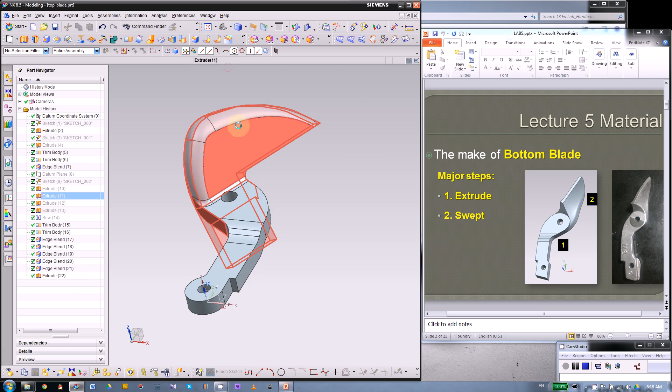Before that, we're gonna start with the top blade. As some of you found out, the instruction video I gave you has some mistakes - the blade part of this piece was not flat, it was like the extrude was not horizontal. So I did some modification here, and since you already submitted the homework, you don't have to change that.

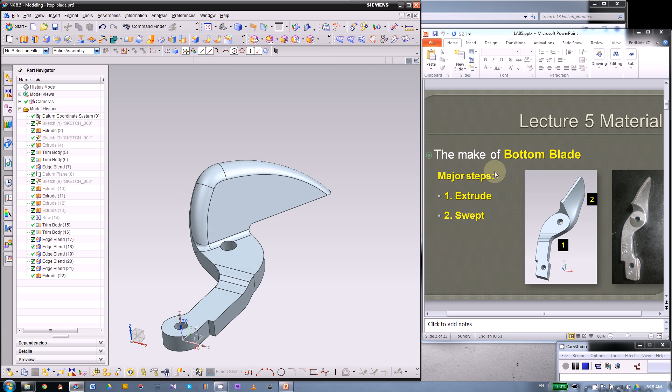We will give out the .prt file, so you can use them for your assembly to make sure the top and bottom blades fit each other. You can also follow this video to modify this top blade.

So what I did is basically you first change this sketch. Remember we had a fillet here, so first we're gonna get rid of that fillet. You can use quick extend to extend those two straight lines and make them connect at this point. Then you delete that fillet.

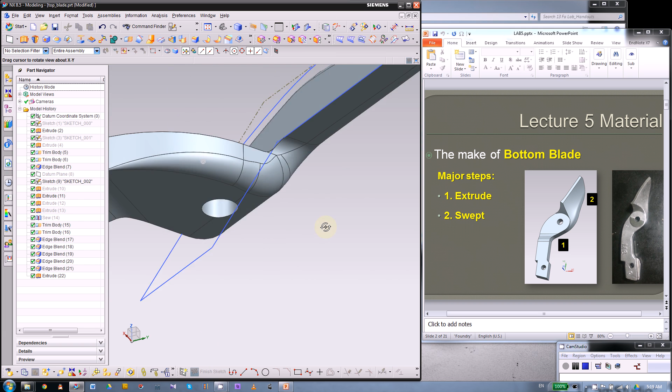After that you will extrude as usual, so you don't have to change the extrude. It will automatically give you that straight corner, but you will have some problem for those extrude edge blends - they will have errors, so you can leave them alone and take care of them later.

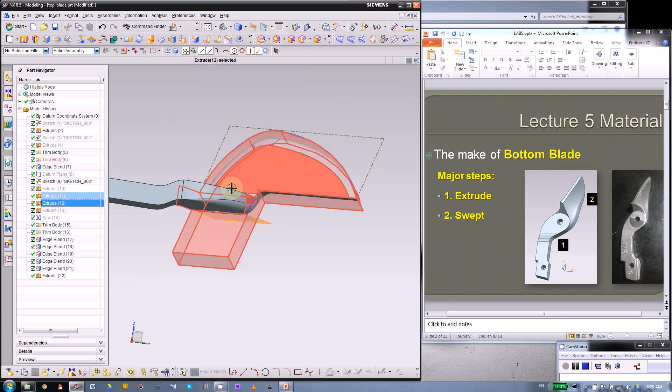After that you will basically extrude two edges. I guess you need to extrude this edge, so you can use extrude, then pick this edge, or this curve, whichever - I think it's better to pick the curve.

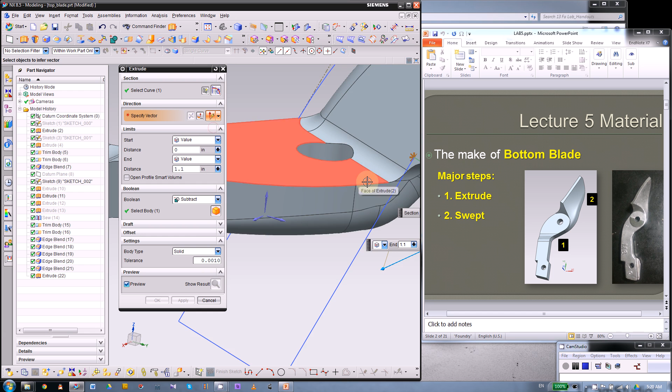Let me see - yep, you can pick this curve. Then you want to specify the vector to be one of these lines, this straight line. Should be inferred - then you can pick one of the lines that will give you a flat or horizontal direction. Then you can change the direction to the other side.

So this sheet will cut into the extrusion we just made, then cut off the excessive solid volume. But we also need to cut off this corner.

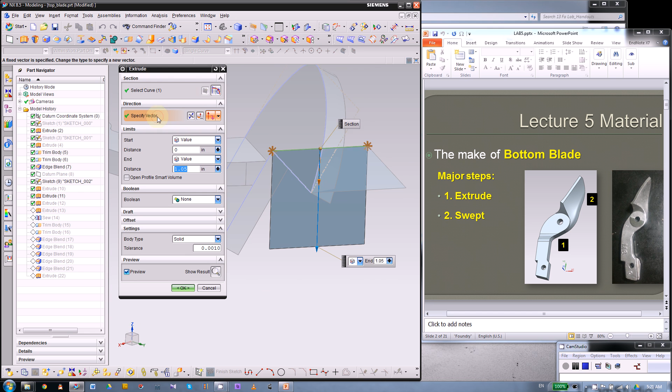So I also extruded this straight line. And for this, you probably need to build a datum and draw a straight line on that direction. Then you can extrude by specifying a vector. This vector should be the z direction, so you can simply pick z.

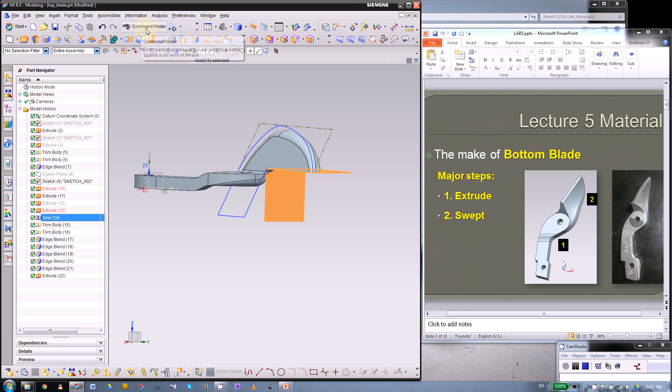After that, you will have two sheets - this one and that vertical one. Then you can use a sew command. It's very deep down in the menu, so you probably want to use command finder to find this command.

Simply type in the command, then you can pick this command. Then you can pick two faces. The purpose of this is because trim body can only have one sheet as the tool, so you cannot trim this corner at once using two separate sheets.

So you want to combine them into one before you do the trim body. After that, you will have this rectangle sheet.

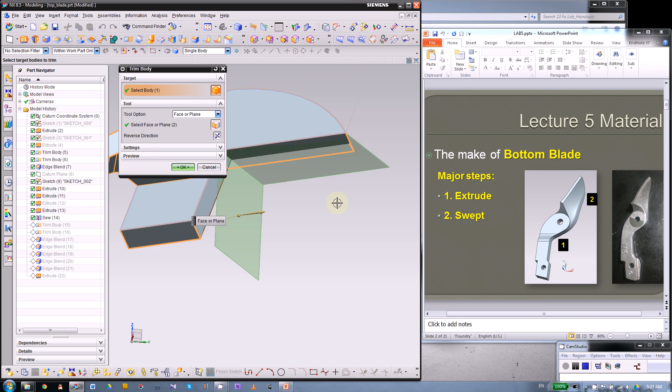Then you can pick the body, then pick the face. But here you want to just pick from the part navigator, so you can pick two sheets at once. If you click on the geometry, probably you will not be able to pick both of them. So that's what you're gonna do.

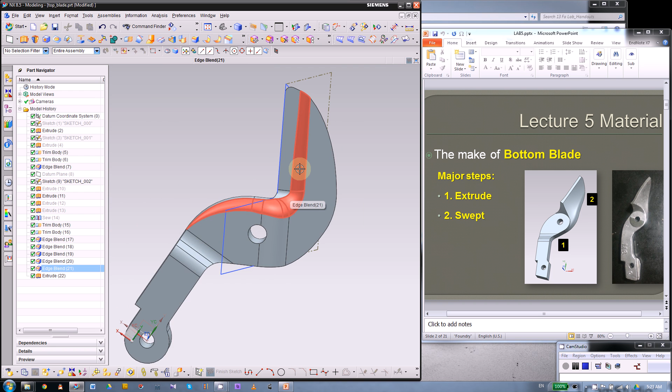After you trim off this corner, then you can go back and do the edge blend and fix it. Probably it's better to just delete this last edge blend because it will have a lot of errors, so you can redo that. That's the process of fixing this top blade.

Now let's start with the bottom blade. The bottom blade basically consists of two parts - this flat piece is relatively regular, it was made from extrude. Then this piece, number 2 in the picture, is made from sweep.

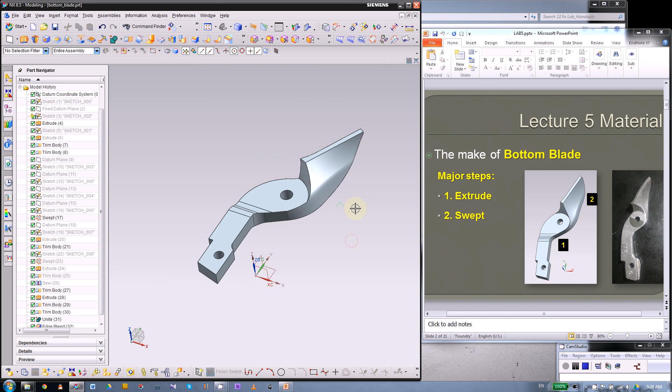So we're gonna separate this part into two major steps. The extrude part will be basically flipped from the top blade. So we're gonna start from this top blade and use save as, following this slides, we're gonna use the top blade as a template.

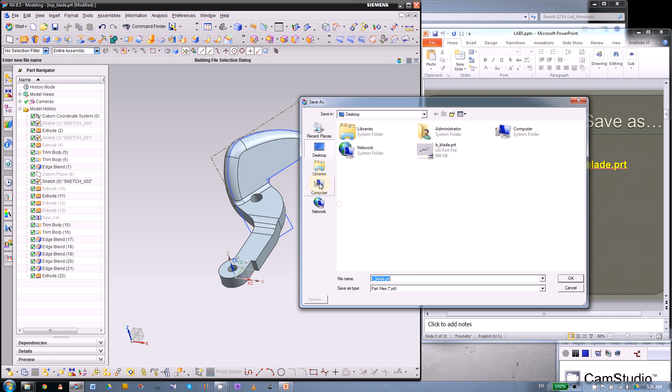Okay, so first we're gonna save the top blade as bottom blade. Then we're gonna do some cleanup. We only need two things, I think. Yeah, we only need first this sketch.

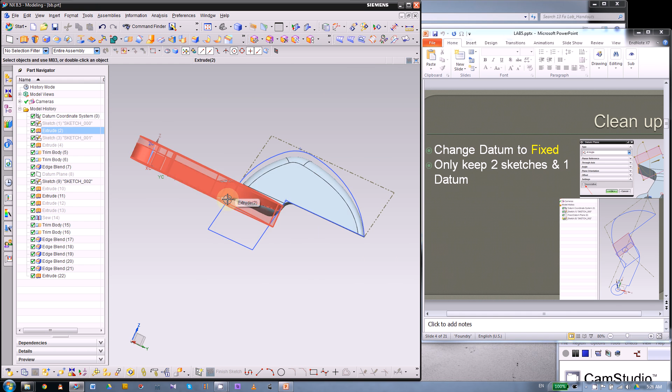This sketch will define the height of the blade for the bottom, so the two blades will match. The second will be this sketch for this extrude, and it should be exactly the same as the top blade, but different shape, extrude.

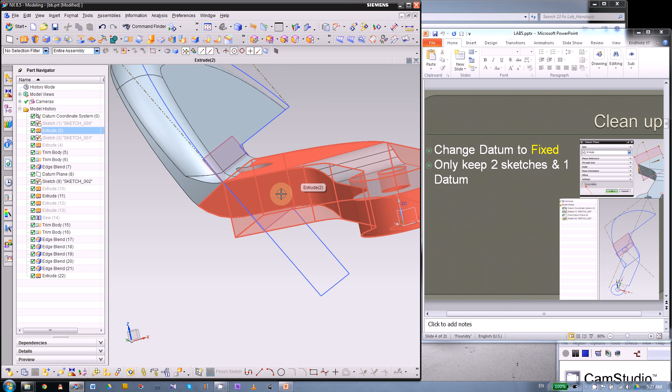So first thing is we're gonna change this datum. We can show this datum because it's based on this extrude, and we are going to delete this extrude. So you want to make this datum a fixed datum instead of relative datum.

After you delete that extrude, this relative datum will be deleted. That's the reason. So we can double click this datum, and clear this checkbox. Then this will be a fixed datum, not related to this extrude anymore.

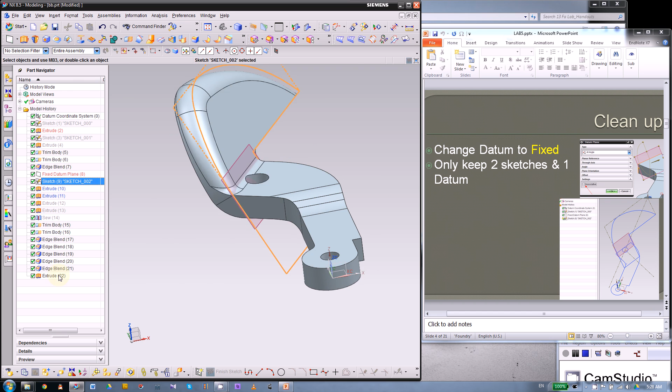Alright, so let's see, we can start from below everything below this sketch, delete them, and see what happens. Alright, that's fine. We will need those two, so we're gonna try to delete them one by one, or maybe from here to here. Let's see what happens. Alright, that's fine, and don't worry about this mark here.

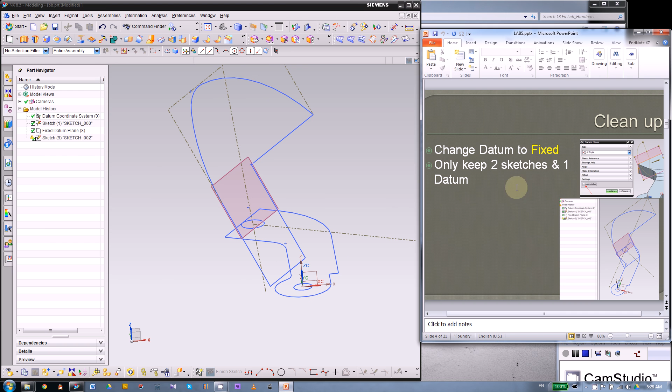All we need is this sketch. Alright, so as you can see in the slides, we're gonna keep three features of the top plate, which are the two sketches and one datum.

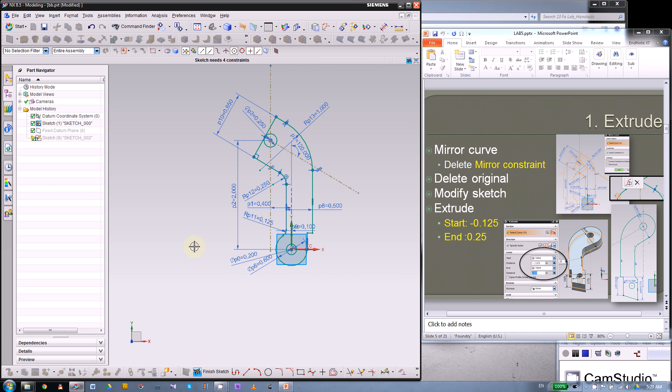Next, we're gonna modify this sketch, so we can hide those two features. And from here, we're gonna flip the whole geometry to the other side. So we're gonna use mirror curve.

We can pick everything here, and the center line will be again this center line, the center of this hole. Then we can click OK.

Then we want to delete the original part, and we cannot do that now, because once you delete the original part, the mirrored part will also be deleted. Look, if I delete this curve, that line is deleted also. That's why we need to first delete the mirror constraint, which is here.

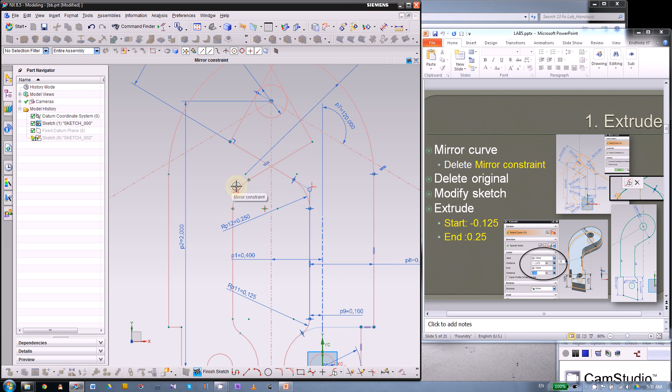You want to make sure you have the show constraint turned on. Let's see where I can find this - display sketch constraint. If you have this turned off, you will not be able to find that. So you want to turn this on and hover your curves on top of this constraint, and you can see the text. That's what we want to pick.

Then you can simply press delete. So now we can delete everything on the original shape. We're just going to pick them up, and I don't want to pick this datum up.

And then also those dimensions, since they're the dimension for the right side. All right, that's the left side, and if you remember, we had two circles here. Once you delete one, there's still one there.

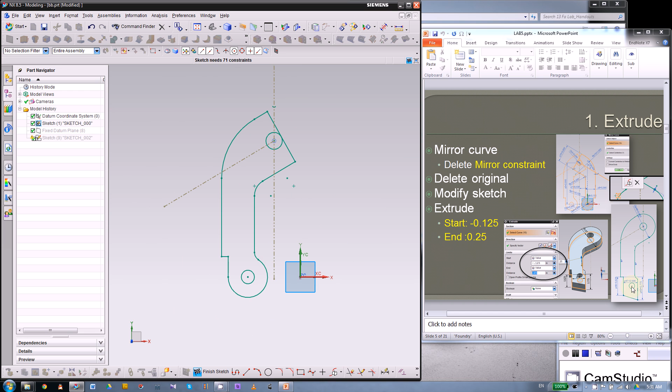And now we're gonna do some modification on the bottom of this, let's say, handle. The shape of this part is more like a square. So we're gonna first extend this part, then add another straight line here, and I think we can just simply delete - no, cannot.

Okay, so I'm gonna put a dimension here to extend this straight line, but by default I think this line will go up instead of go down. So what you want to do is first fix this short line.

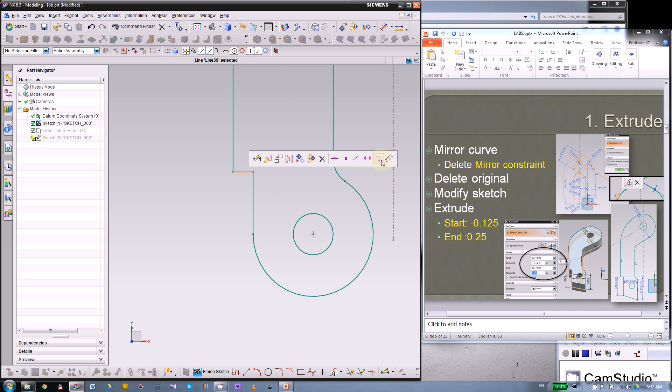So once you click this, we can use fixed constraint. Actually, you can fix this whole top part of the sketch, but we're just doing this one by one. So this line will be - let me zoom in a little bit.

0.625, that'll be 0.625. So this thing is going up, and I'm gonna put a constraint here, coincident - make this point be coincident to this point. So that will make this thing come down a little bit.

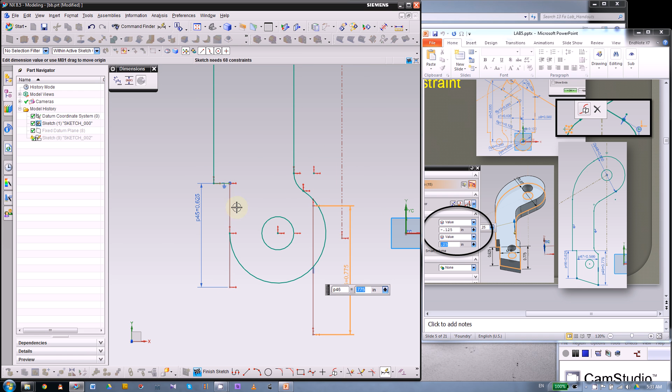Then on the right side, we're gonna draw a straight line. Then the dimension will be - the length should be 0.775. Then the distance between these two straight lines is going to be 0.85.

Then we want to make sure this start point is aligned with this short line, so we can put a constraint - point on line. We're going to constrain this point to this straight line. That will give us this dashed line. Then we can close this cap.

Lastly, you want to just trim off the excessive curve. So that's it for the bottom, and then we're gonna make a circle on the top.

Which will be 0.85 in diameter. So we can simply just draw a circle here, diameter will be 0.85. Okay, so it seems this thing moved a little bit. I'm gonna come back - either we can fix this line first like this.

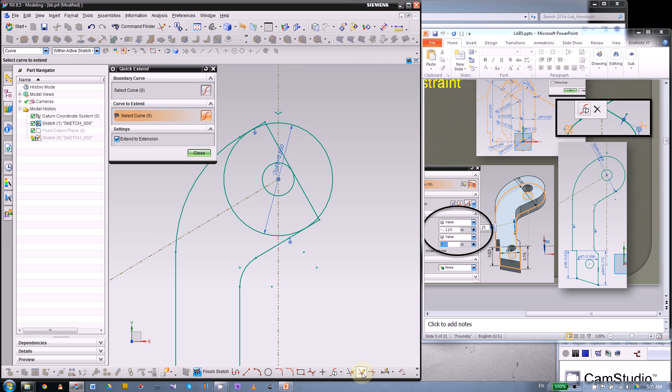Okay, that might be a better idea. Then we can add the circle, 0.85. Okay, so now we can trim off those curves.

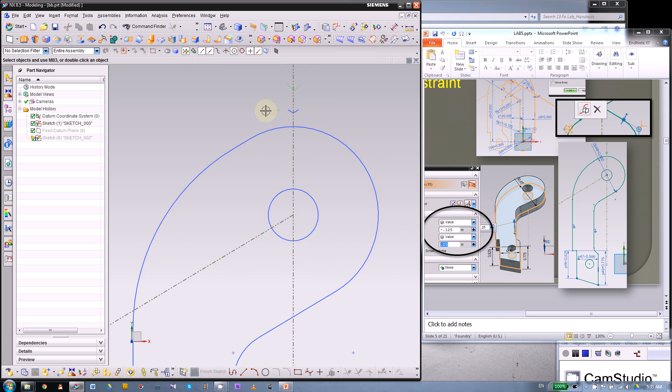Okay, so this will be the finished sketch. Now we will extrude this part. So let's see what we have here. Okay, I think we have a little bit more things to delete. Okay, all right.

So if when you made the top blade, you followed the coordinate system as I did, you should have this parameter for your extrusion, and that's because we have this sketch here. You want to make sure the depth and position of this extrude is aligned with the top blade, so when you assemble these two pieces, the blade will touch each other.

Okay, so all right, then let's extrude, and again we're going to ignore this hole first because we're going to add something on top of this hole. Then we can extrude this hole at last to subtract all the volumes we don't want.

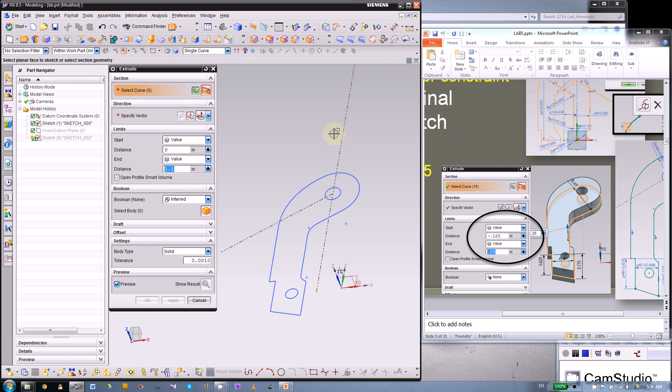Now we use connected curve, pick the outside curve as well as this hole at the bottom. The volume will be from negative 1/8 to 1/4 positive, and press enter. You can see the extrude.

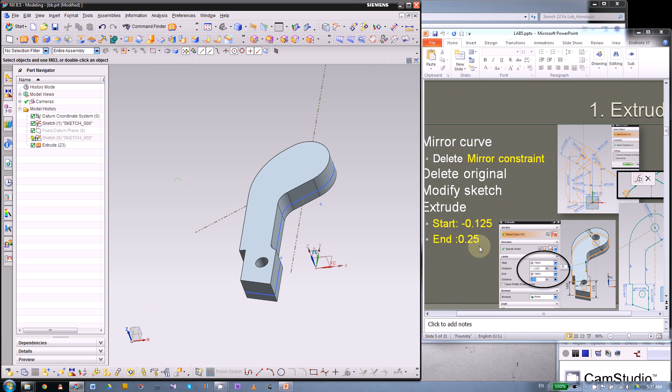Yeah, and I think I missed the part on this slide, but you will see what happened when you extrude this first. It doesn't matter, you can just extrude that again later.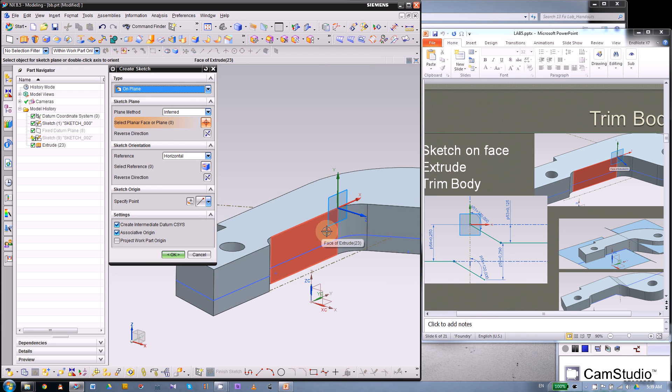Alright, now we're going to again make this sketch, then cut off this handle piece. So we're going to build a sketch on this face, this inside face on the right side, and click OK. So we know the thickness of this is, I think, 3/8.

Okay, we have 1/8 below the orange, and we have 1/4 above the XY plane. So that's the dimension, and we can hide this extrude first, as well as the sketch.

I'm going to just draw some random curve first, about this much, then go that way. Just make sure this thing is long enough.

And then the second one would be a little bit here, over to the top, then here. Okay, and I think this is not long enough. You can simply drag this point.

Then we're going to put in dimensions. This will be 120 degrees, and since when we drew this line, NX automatically caught the parallel constraint, so we don't need to add another dimension here. Otherwise, you will get an over constraint.

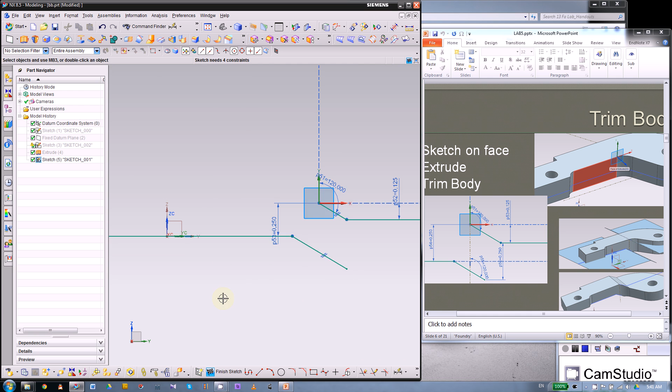Okay, let me have a look. Yeah, actually we do. Yeah, we need some dimension here. Let me have a look at my part.

Actually, we need this piece. Okay, so alright, it's not a nice number. Let's make this 1.2 or 0.12. Let's see.

Finish sketch. From this point to y-axis, that will be 0.12. That's why we have such interesting difference.

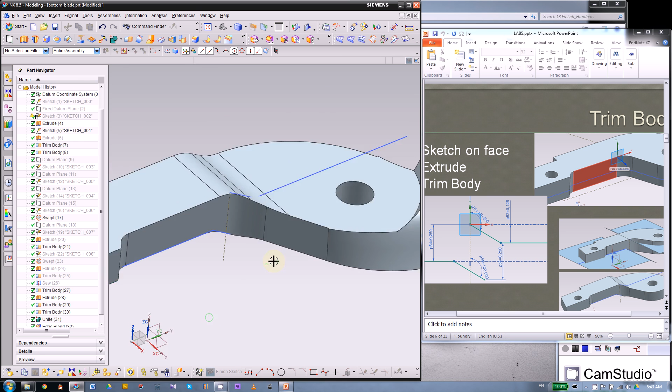Okay, I'm just going to... alright, I have a better idea. Since this thickness is 1/4 inch and this distance between these two lines should be 1/4 inch, so I'm putting 1/4 inch here. 1/4 inch. Well,

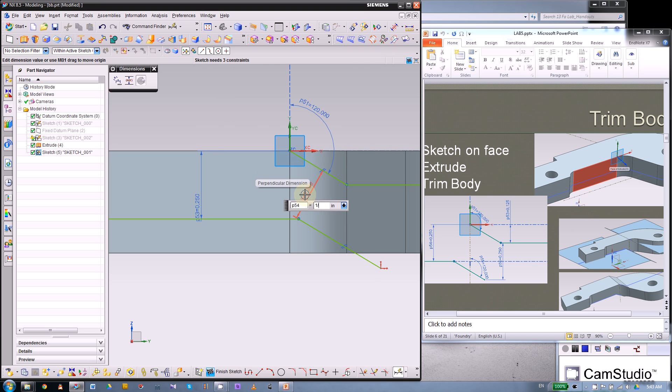Okay. Then make sure these two lines are long enough. Then we can finish the sketch and extrude. By the way, you can pick this sketch first, then you can use extrude, so you don't have to pick here.

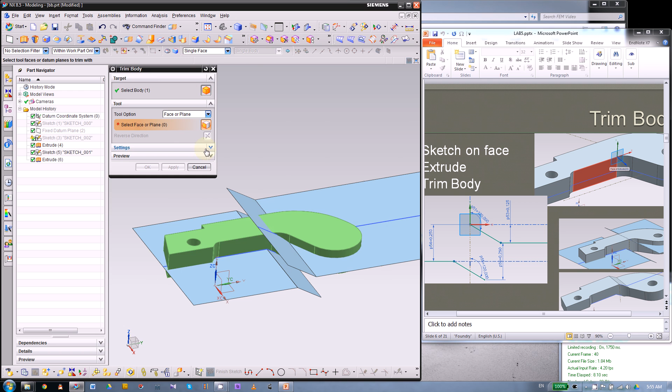Then we're going to use symmetric value and make sure this sheet covers everything of that and solid. So okay, next going to trim the body, and just pick this body. Then you can pick and paste this one, that one.

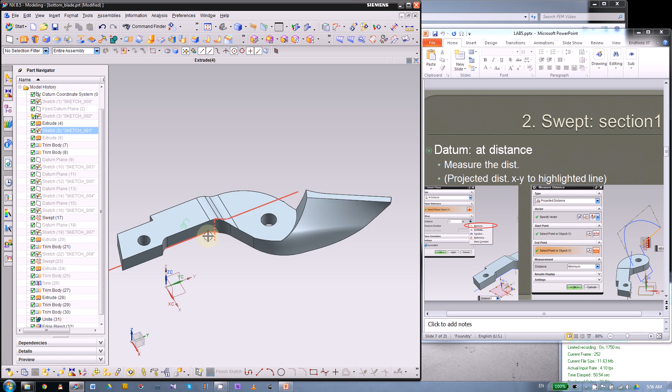This is done. Next we will build a sketch for the swept part. So we are now starting this blade part, and we will have actually two sections for the swept.

Okay, so this piece is made from a swept. The top and bottom sketch will be the section, and we have three guidelines, which is 2 on the left side and 1 on the right side.

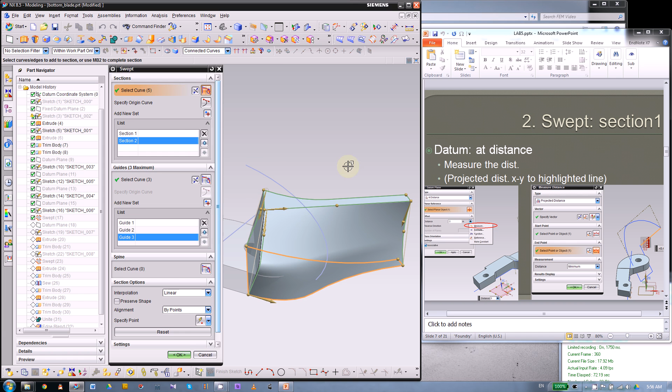Okay, so now first we need to make the top sketch, which should be aligned with the top blade and the actual position of the blade.

So first we're gonna build a datum which is parallel to the XY plane, but it's at the same height as the top blade. So here we want to measure the distance between the blade and the XY plane.

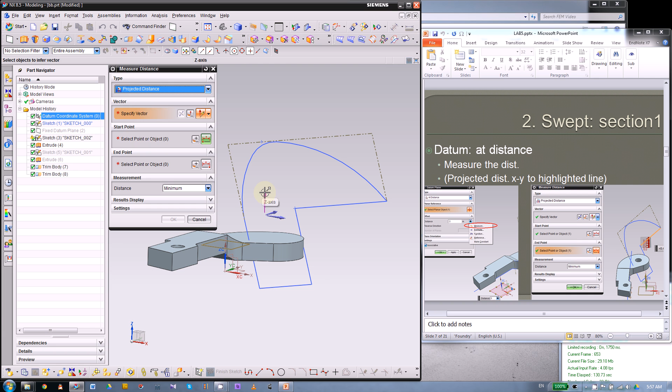So we can click this arrow and choose measure. Basically this one is the same as the measure distance command. We're gonna choose projected distance, then specify the z direction as the vector, then pick the line to the XY plane. That will give us the distance between these two objects.

Then you can click OK. Once you click OK, the distance is automatically filled in this blank here. So we can just click OK here. Now we have made this one datum.

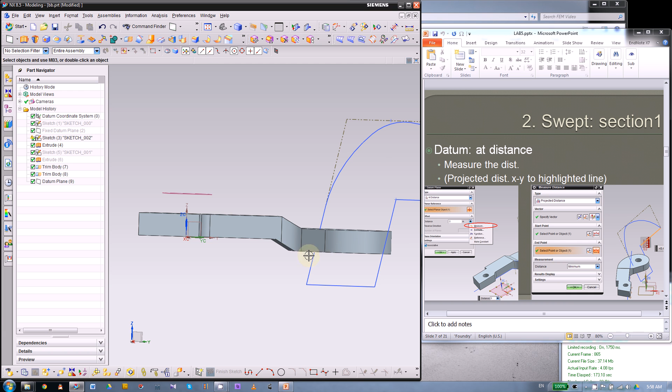Then the second datum will be the same as this bottom piece, and that will be, if you remember, 1/8 inch below the XY plane. So we can build another datum now or later, and I'm just going to build this one.

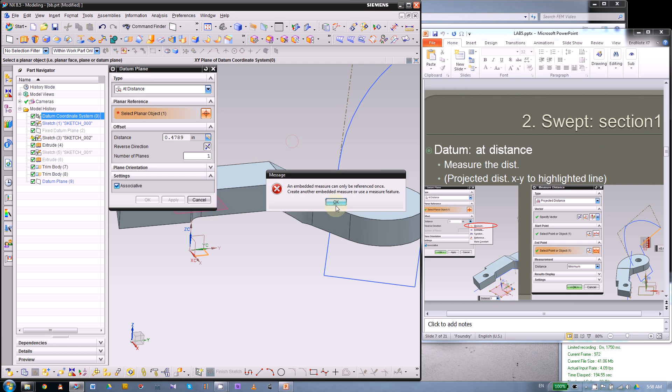Once you use the measure distance tool a second time, you will get an error. So just click OK, then type in the number you want. That'll be 1/8. Press enter and reverse the direction, so that'll be below the XY plane. Okay, so now we have two datums for the two sections.

Okay, now first we're gonna start a sketch for the top section. So we're gonna pick the top datum. Then we will first extract this blade curve from the sketch.

We're going to use project curve. Then we only need one curve, so we can use single curve for this curve rule. Then you're gonna pick this and click OK. Now you can see the color change - that's actually the projected curve.

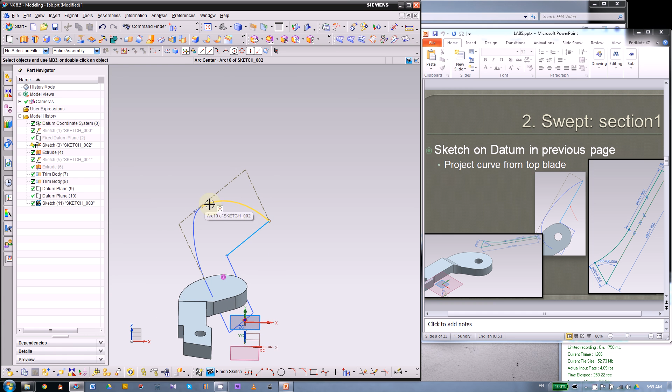So we don't need this sketch anymore, we just hide this. And that's what we're going to draw. Okay.

Alright, so what we have here is the right side of this shape. So we can draw the top, which will be perpendicular, and it should be 0.1 inch, and the angle is perpendicular.

Now we can draw this left side also, which will be 1 inch in length, and just keep this parallel. And on the other side we are going to draw something longer than the projected curve.

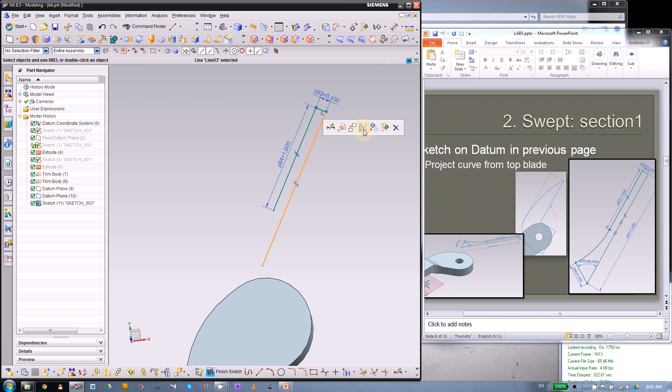So what we can do is first turn this projected curve into a reference. Then we can draw the actual straight line, which will be 1.65 inch, in the same direction.

Now we're gonna leave this arc to the last, so we're gonna draw another straight line, which we can give a length of 0.35. I don't know the angle, so just leave it there and put another angle here - that'll be 60 degrees.

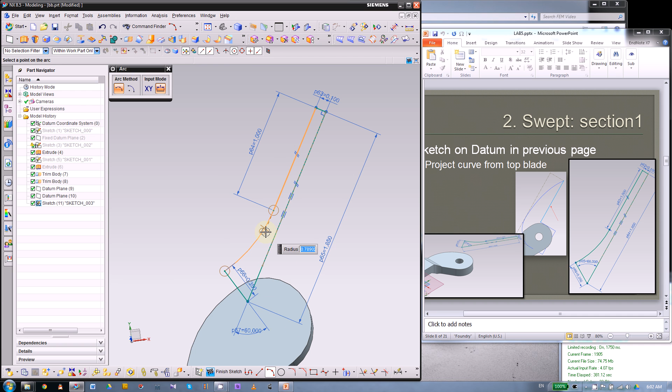Okay, so last we're gonna finish this arc here using this 3-point arc, from start point to end point. Then the middle should be tangent to this straight line. As you can see, there's a straight tangent sign here. So that'll be it, and this is for the top section.

And I can finish this sketch. So now we're gonna start doing the bottom section from this datum.

So we're gonna build another sketch on this datum, and as you can see, the coordinate system is reversed. We can reverse the z direction by double clicking on the z-axis.

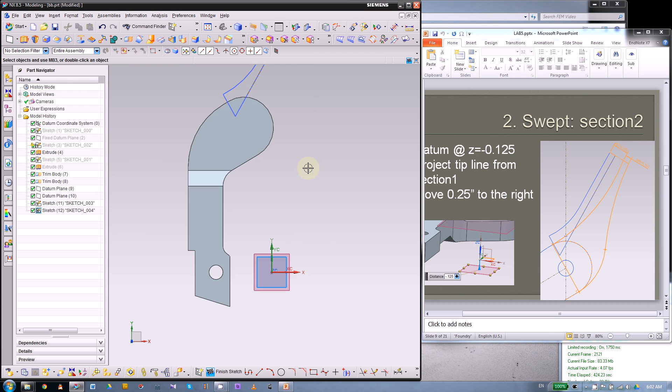Okay, so that will be this part, and the top would be - let's zoom in a little bit - a 1/4 inch offset from the top section.

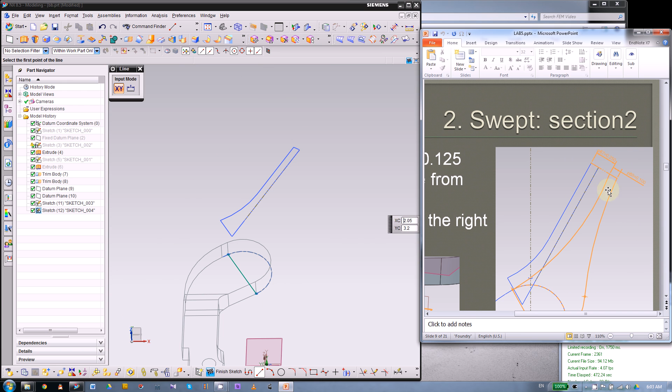So the whole thing will be a little bit tilted, and that's why we need to project this curve again. So we're gonna project this short curve. Okay, then when you're done, we can turn this into a reference, so that will be exactly the same position as the top section.

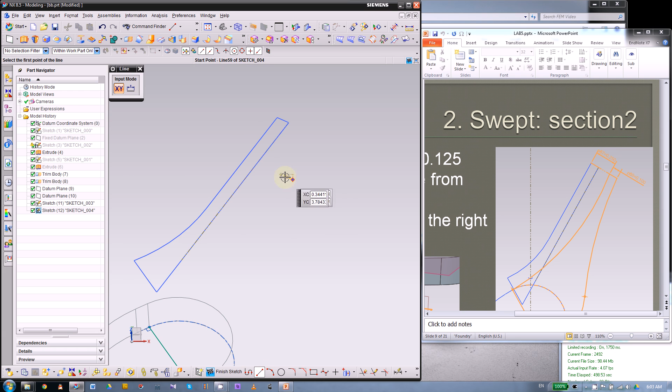Now we will be able to draw something, let's use F8. You can see this line is off a little bit.

So we need to find out the intersect point of this shape on this datum. But let's first start a sketch on plane, and we want to pick this datum. It's relatively hard, so we can pick it in the tree.

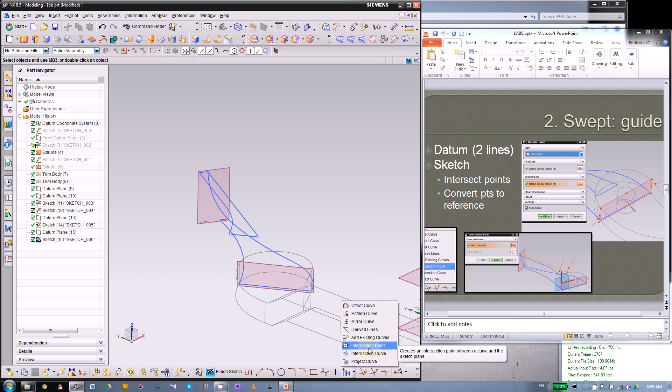Alright, so now we have the sketch, and we want to find the intersection point. The command is here, and you can only do this for one curve at once. So we're going to pick one curve. As you can see, there's a point here. Click apply, then you want to do this for another curve.

Close. Okay, so since they're pretty small, you cannot really see them, and I would turn them into a reference. That will give you a big point, and you want to pick the point. Make sure you pick the point. Okay, so those two points are actually on this sketch, on the datum.

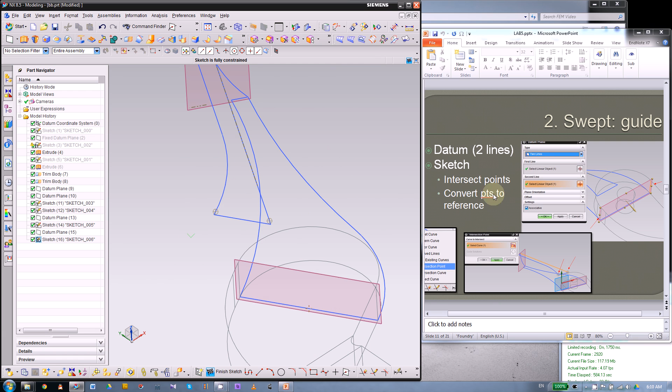Alright, then the next step will build a sketch that looks like this, and basically you want to draw a straight line which is aligned with on top of this edge, so exactly matching this edge.

Then you want to draw a 3-point arc from the end of that straight line to the point. Then make sure this one is tangent to this straight line. If you cannot snap to this straight line, you can hide the solid. Make sure that will help you clean things up.

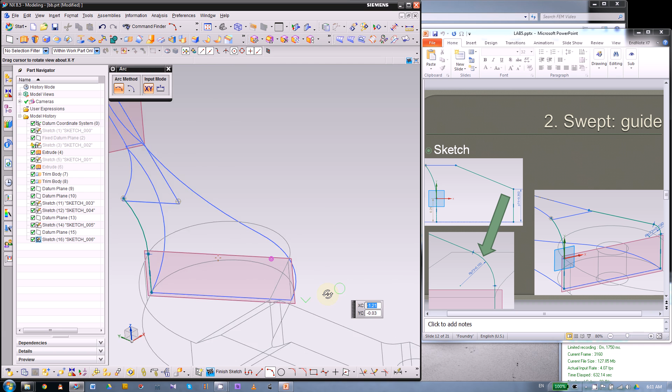Alright, now the other straight line will be here, but this one will be a little bit higher, at 0.35. Enter. Okay, that'll be vertical. Then another straight line from the point to this vertical line. Then we will put a fillet here, which is 0.1 inch in radius. So that'll be it. Finish sketch - these are the two guidelines for this swept.

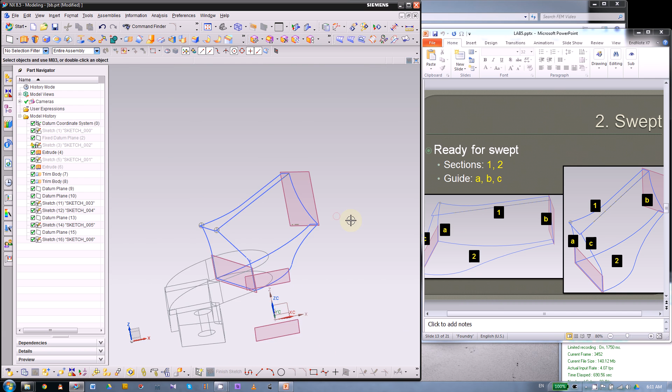Okay, so now here comes the swept. We have the top and the bottom sections. Now we have three guidelines. Let's see what we have. You want to use linear and by point for the alignment. Let's start using the swept, which you should be familiar with.

Again, you want to make sure the origin curve is at the same position. If I click here for the top, you want to use connected curve. Let me do that again. So if you click here, this line will be the origin curve, and the direction is counterclockwise. Then we add another set for another section. You want to click at the same position, at least a similar position, and the same direction, so that will make your shape look reasonable.

Then we can pick the guideline. Again, if you pick the top half of the guideline, the direction will be from the top to the bottom, and that's like this. For the other guidelines, you want to do the same to make sure they have the same directions. Don't forget to add a new set for each guideline.

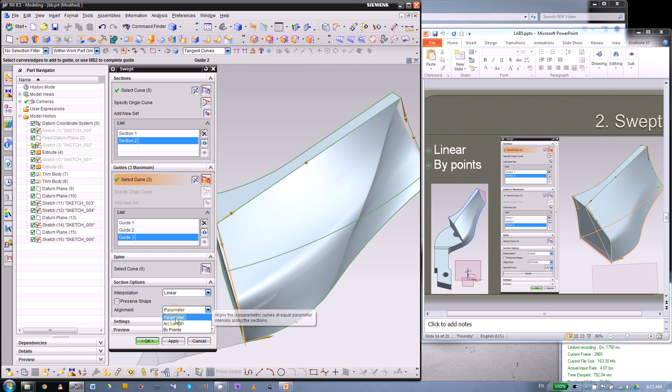Okay, and we can have a look here, and you can see it's not aligned properly, and we can change this to by points. That will give us a better looking result. Then we can click OK. Alright, now we have the two pieces.

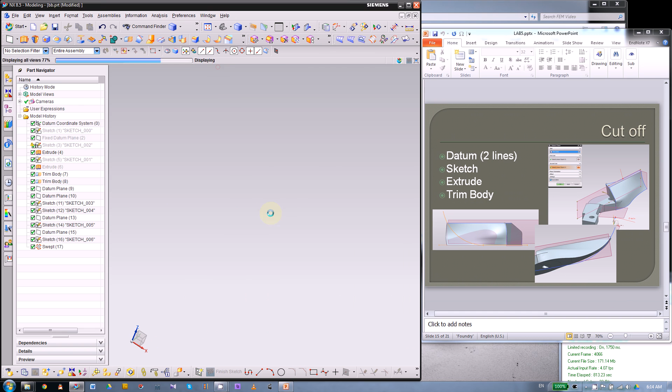Here comes the complicated part. We need to cut this swept piece, we need to cut off this, and first we need to make a - well, we have two cuts, one here and another one at the bottom. So let's start with the simple one.

It will be the bottom, and we're going to build a datum which is vertical and on this curve. So we're going to use the two line method. First pick this line, and then next we're going to make sure this one is vertical, so we will pick the Z axis, and as you can see, that's our datum.

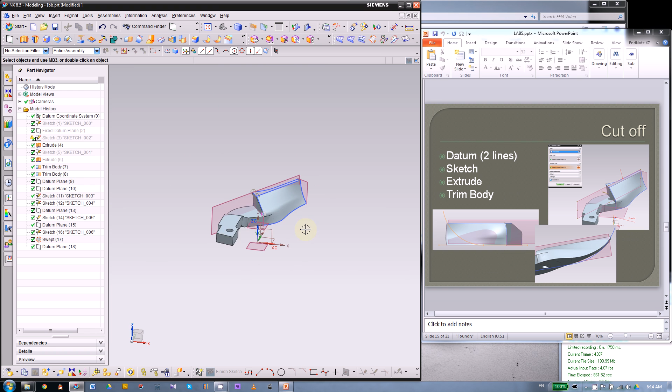Okay, and we will draw some shape like this, and you don't have to worry about the dimension as long as your shape looks reasonable. So again, my sketch is flipped. That doesn't matter. First, we want to build a straight line.

So you can snap to any point, and maybe stop here. Then we can use the 3-point arc. You want to snap to the line you just drew instead of the solid. Then maybe somewhere here, and you want to make sure that the left side is tangent.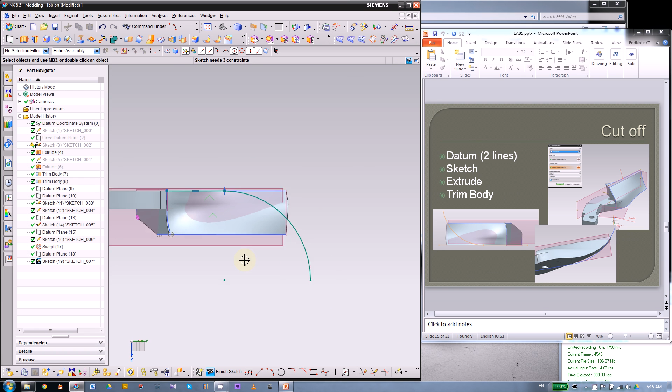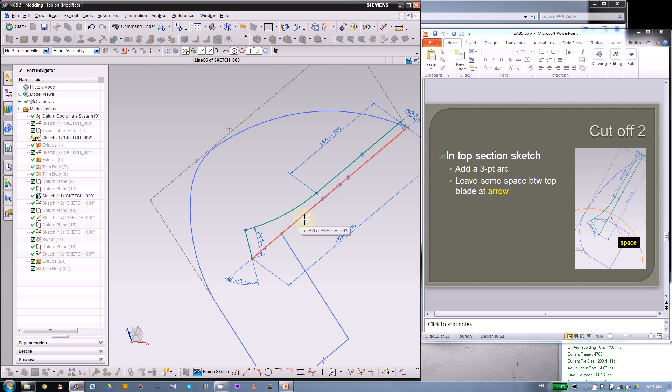Okay, now since we have the shape, all we need is this sketch and the blade sketch. As you can see, the top blade is shorter than the swept we just did, so you want to cut maybe 0.1 inch, more than 0.1 inch, because there was an edge blend here, so you want the bottom blade to be able to fit in the top blade.

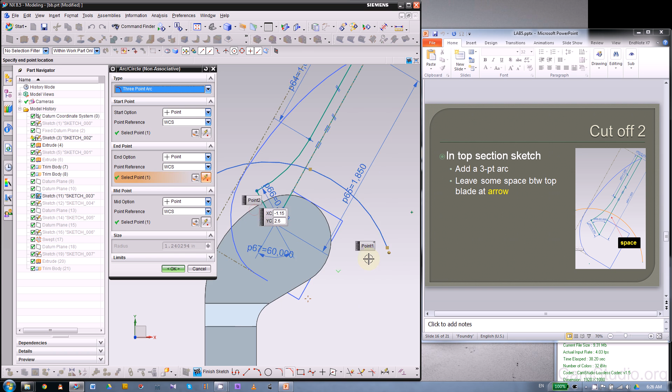Alright, now we have the top arc. We also need a bottom arc for the sweep, so we're gonna build another sketch on top of this face.

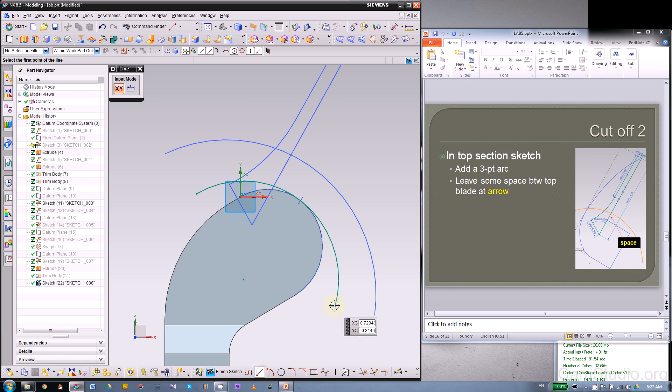Here the 3-point arc will be basically the same as this 2-point. Then in the middle, you want to make sure this one is tangent to the edge of this solid. Once you see this small line, that means they're tangent—that's the tangent constraint. So after that, you will need to cap this using a straight line.

We will extrude this line into a sheet also. So here we have everything ready for the swept.

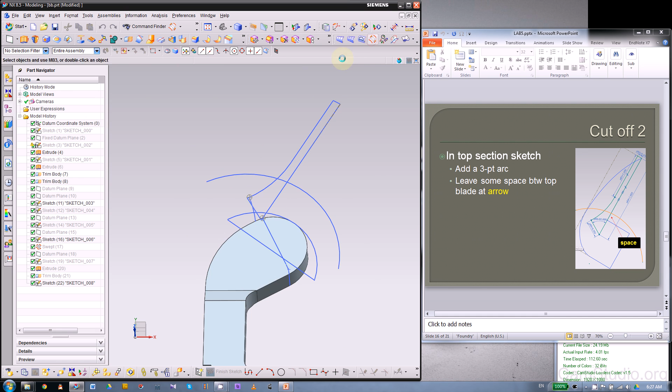I'm gonna need that guideline also for the swept. So swept, the top section, and another new set for the bottom section. Then the guideline will be this one, which we already used.

So that's the sheet, and we will next extrude this one, the straight line, into another sheet. Here you want to use single curve, and the vector would be this edge, the horizontal edge.

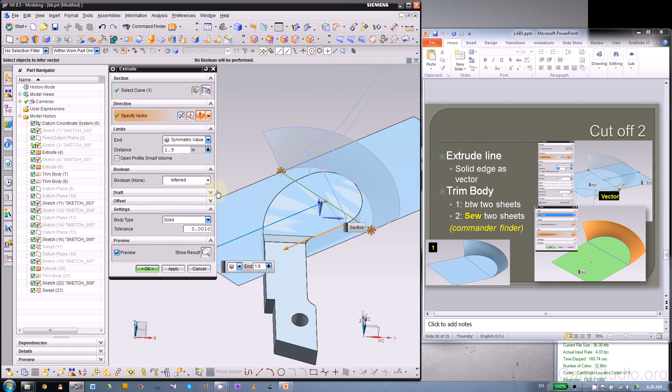You want to choose inferred, then choose this edge. Nope, that's the face. Edge. Okay, and that'll be a symmetrical value, and you want this to be as big as possible—big enough to cut off the solid.

Now we're gonna trim off the right side of this flat sheet. So we're gonna use trim body. Pick this as the body, as a target, then pick the swept sheet as the tool. Then we can cut this too.

Next we're gonna sew them together. So sew command again, which is here. Then pick either one. Click OK.

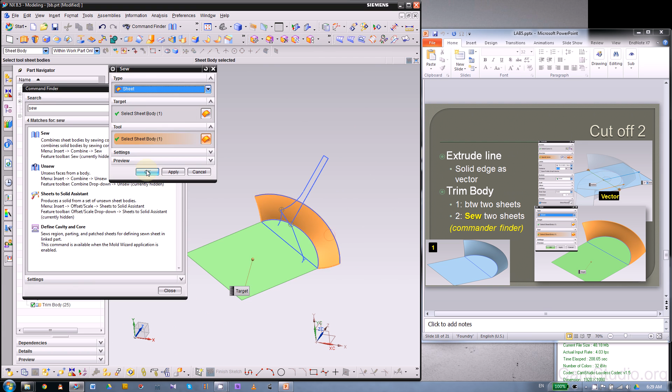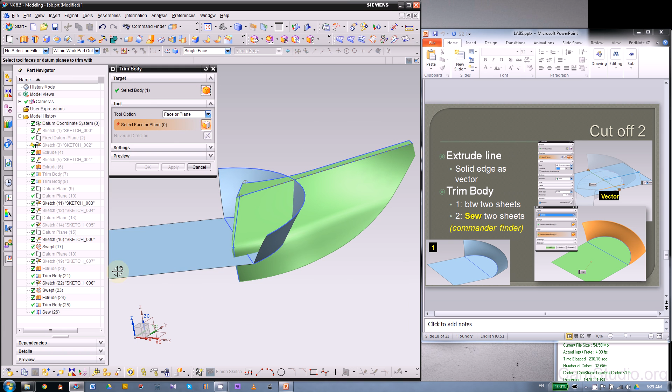Now we're gonna use these sheets to trim off some volume from this swept solid. So again, we're gonna use trim body, and this time the body will be the swept. The plane will be the sew here. We're gonna pick from the part navigator, and make sure the direction is right.

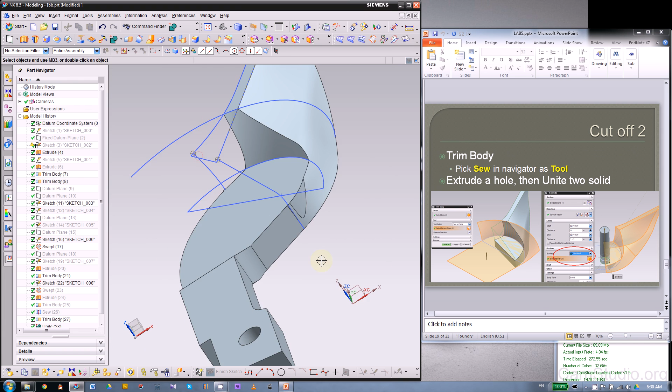Now let's hide the sheet, show this solid piece here. What we can do is, if you unite these two pieces right now, you can see there's an edge here. I didn't detail this in the slide because you can pretty much ignore this little defect. What I did in the model is some trim off again.

Let's see, show this. I did some trim body again. The body will be this extruded part, then pick a face—will be this, the side face of this extrude. So we're gonna cut off this excessive volume.

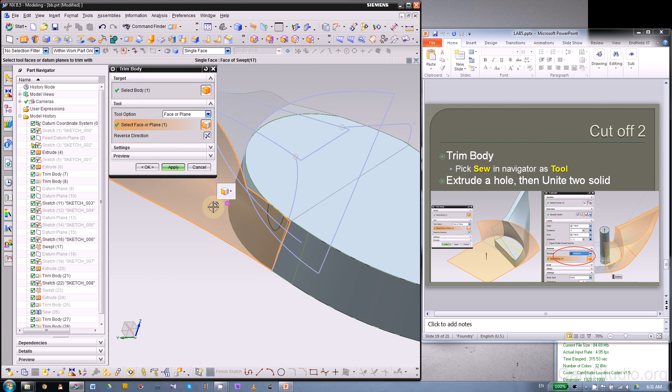That is one. On the left side, we also have something here, if you can see from the difference. So the body will be this one, face will be on this swept face. Apply and close.

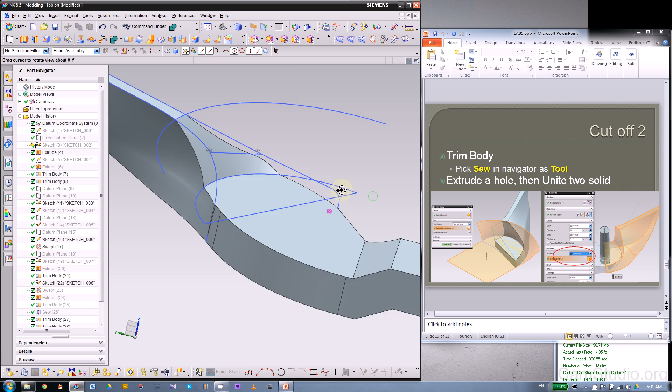Now if we merge these two together, unite this and that, once you click OK, you will get a smooth face here, which is nicer than not doing this. But this is not required.

So the last thing is the extrude for the hole, if you didn't do that. So extrude the hole, and need to show this sketch. That will be subtract from this body.

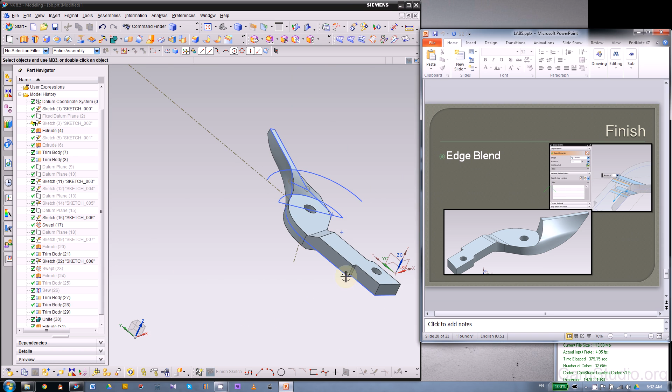All right, now you have the bottom blade, and I forgot something—the edge blend, which is very simple. You can use wireframe, pick 4 of these edges, and the radius will be 0.3.

That will be all for the bottom blade. If you want, you can pick all the sketches then hide them—that'll give you a nicer looking, clearer look. So that's the part for this.

That's how to make this part, and there's no homework for this part because we're gonna have the report very soon. Next week we will talk about how to assemble all the parts together as a whole piece, then we will talk something about the drafting. For the report, you will talk about how to make each piece, how to make them, how to assemble them, and lastly you will attach a general drafting of the full assembly.

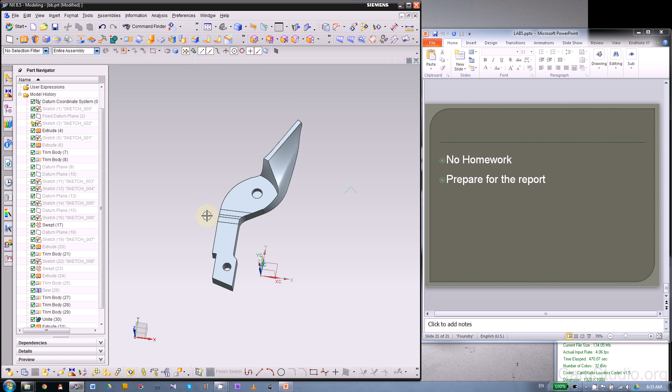The drafting for the parts is not required, so only one drafting is required, and you will have to add some critical dimensions, maybe the total length, total width, maybe total height of this whole piece.